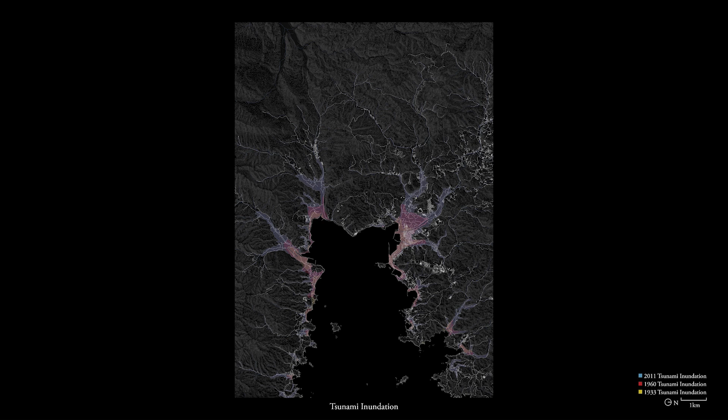Hadenya is in fact part of a constellation of towns along the coast, together known as Minami Sanriku. Minami Sanriku experiences tsunami once every few decades, with the most recent one in 2011 being the most devastating. After the tsunami, the government enacted a three-part strategy for reconstruction.

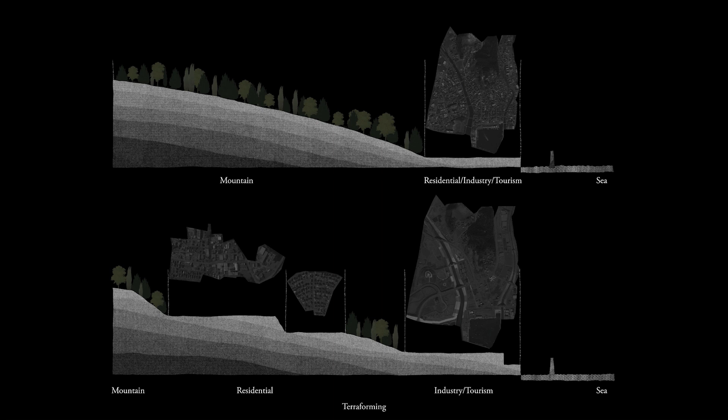First, modernist urban planning was devised in multiple towns, dividing them according to economic sectors. Second, the state terraformed the strata of Minami Sanriku, moving residential buildings to higher areas. Third, and perhaps most controversial, a series of concrete seawalls were built, despite past efforts failing again and again.

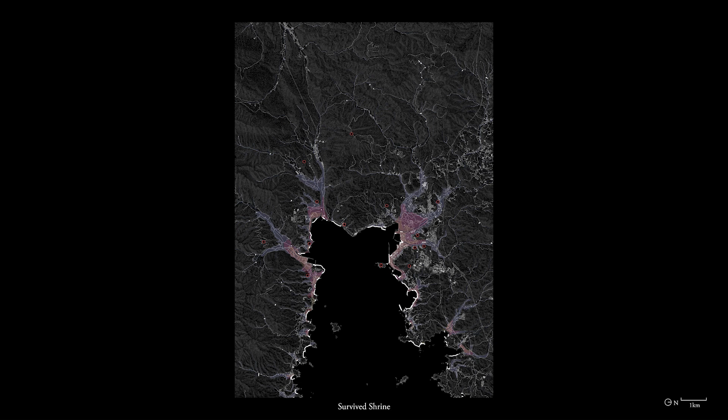Amidst the rubble, people noticed that a disproportionate amount of ancient shrines survived the disaster. The survival of shrines can thus be read as a passing down of an ancient knowledge system that conveys safety.

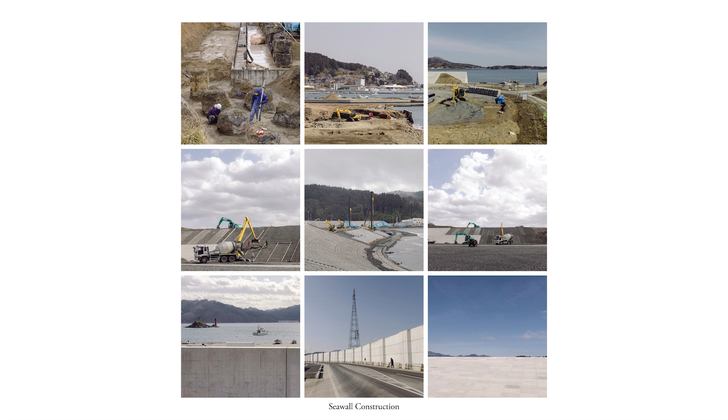Yet the festival continued. The view of the sea is not the only thing the seawall displaced. A knowledge system of safety and social relationships that once relied on regional connections and inheritance of memories is replaced by infrastructure that operates on a national scale.

The sourcing of material and labor for these megastructures can thus be read as a state-mandated attempt to inhibit local knowledge from forming. So, back to the procession.

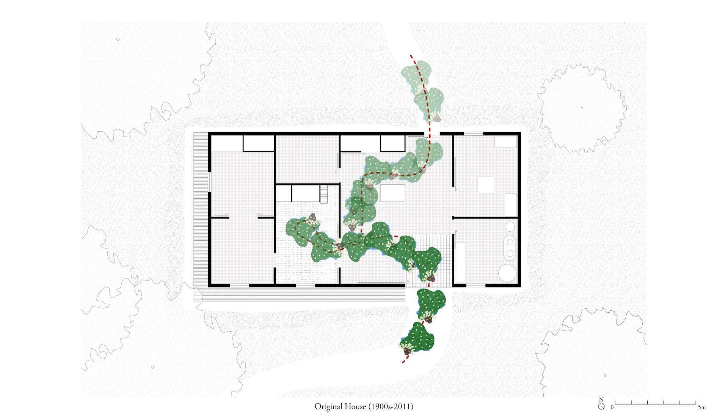As Harumi visits the homes, we can begin to see how the civic dimension of the festival ties into the domestic. The original house was arranged around a courtyard that provided performance spaces. The reconstructed prefab houses saw a minimization of these domestic functions.

However, in the corner of the house, the family altar remained. Referred to as Butsudan, the family altar becomes a miniature shrine where daily rituals of veneration become a mnemonic device for ancestral memory. The shrines and the festivals thus give us a clue of how people are attempting to mediate their own life against the status quo of disasters and infrastructure.

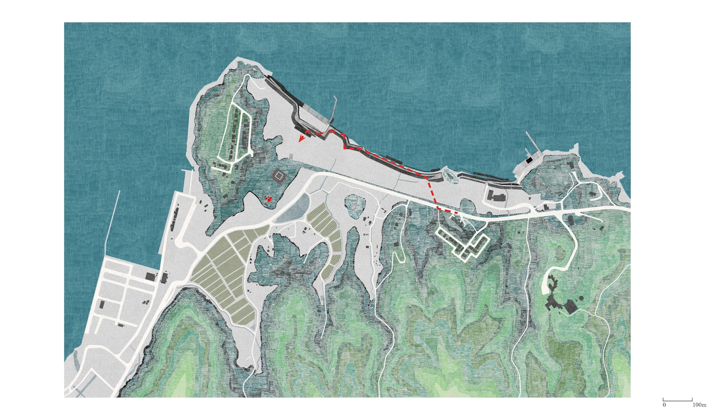Harumi and the procession find themselves on the seawall facing the shrine. It is here that a new series of spatial interventions were built.

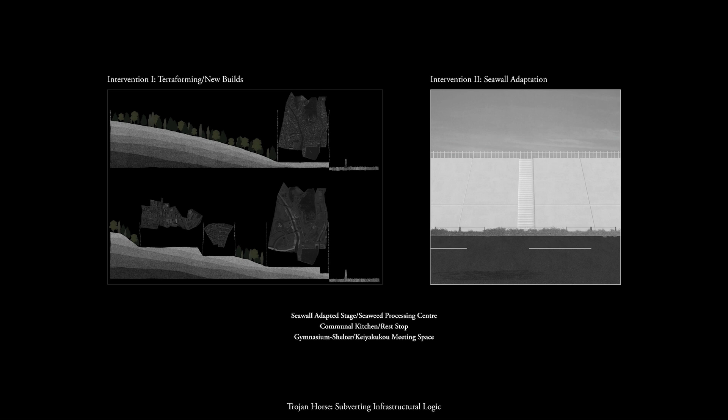Echoing the state's act of terraforming and seawall construction, I propose to implement the same language of infrastructure, but subvert it in a way that can be appropriated by the people of Hadenya. Looking into the town, the terraformed highway made the old road redundant, while isolating the shrine in between.

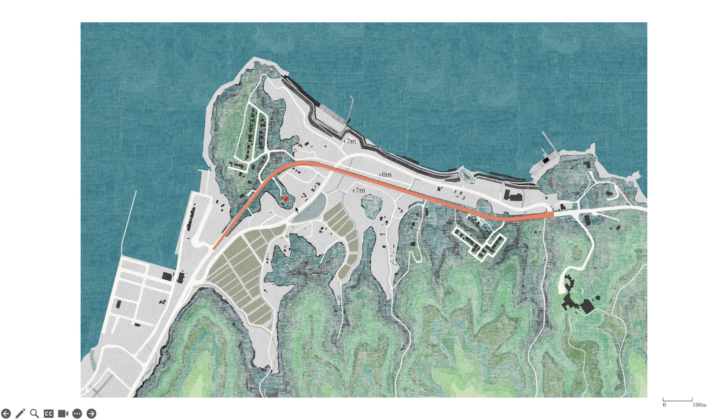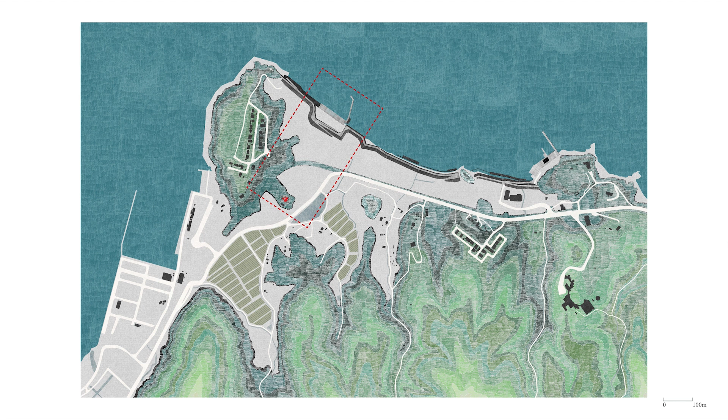As a first measure, I propose to combine the roads together to form just one road, freeing up the shrine and the spaces along the seawall. The parallel morphology between the seawall, the terraform land, and the shrine presents a unique opportunity for intervention.

Additionally, in front of the shrine is a dip, where the land is currently disused. It is in this site that I propose to terraform the land from 2 meters to 8 meters to reconnect the relationship between the shrine and the sea again.

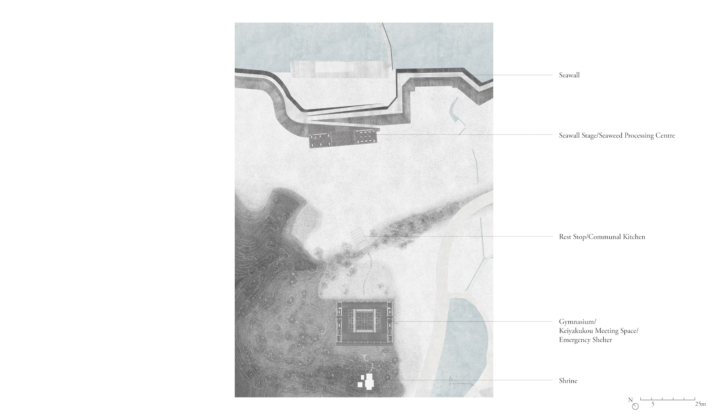Close to the shrine on the terraformed soil, there's a gymnasium that becomes an emergency shelter during times of crisis. In between the shrine and the seawall, extending from the old road, a series of step platforms provide a resting point for the town. Finally, a performance stage protrudes out of the seawall. The stage is also flanked by seaweed processing spaces during times of non-festivals.

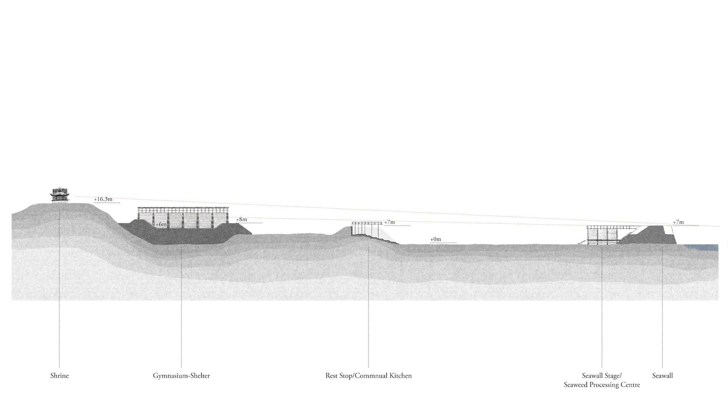The newly terraformed soil reclaims a new vantage point towards the sea, while conforming to the earthwork scale on a territorial level. Going back to the idea of infrastructure language, almost all of them are very heavy, characterized by monolithic concrete structures and so on. Meanwhile, a lot of the ceremonial languages we observe is very light, such as fabrics or timber.

Within my intervention, this contrast between the light and the heavy language also permeates throughout the design. By juxtaposing this contrasting language, the idea of permanence in the face of disaster is challenged. The contrast creates a rhythm between eternity and ephemerality.

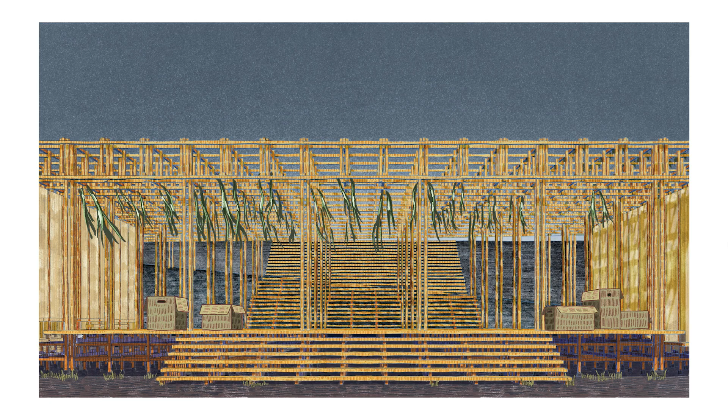Harumi steps down from the seawall and gets ready to perform at the stage. She remembers how it took years to build the seawall, and how the construction was merely a way for the state to boost their national GDP.

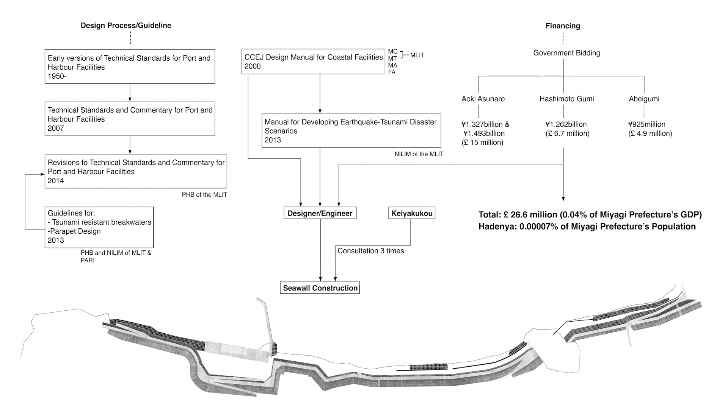Looking up to the sky, the smell of drying seaweed reminds her of the harvesting season to come. The lightweight timber creaks when she moves, and the timber stage underneath her vibrates gently when they dance. Against the seawall, the stage seems so vulnerable, and it was meant to be that way.

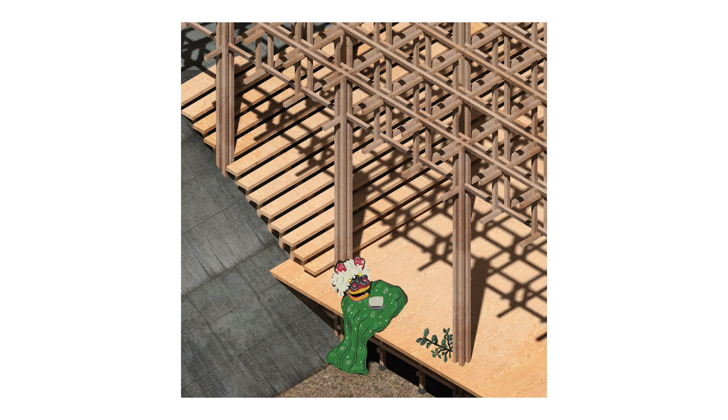She then leads the procession up the platform to where the road used to be. She remembers how her father used to rest at people's homes. Nowadays, this tiny rest stop provides a nice stopping point in the town.

She leans against the terraformed soil and looks at the kitchen where the Keiyakukou used to cook dinner last night. The rest stop reclaims the rhythmic pulse of the procession.

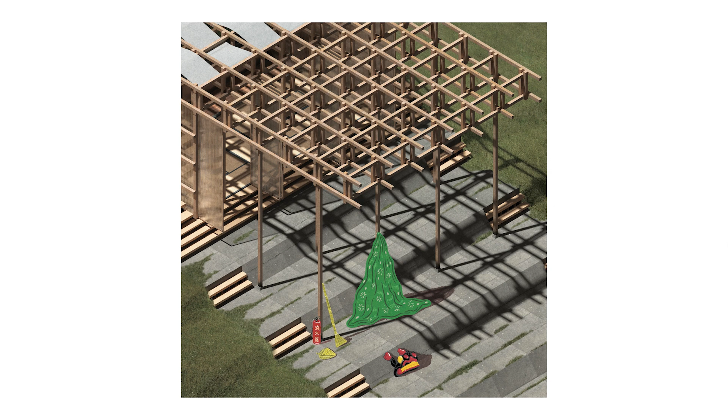Harumi gains her strength and climbs up to the indoor gymnasium. When they were forced to move to a nearby gymnasium after the tsunami, she recalls how strange it was for a place for sports to become a place where people lived.

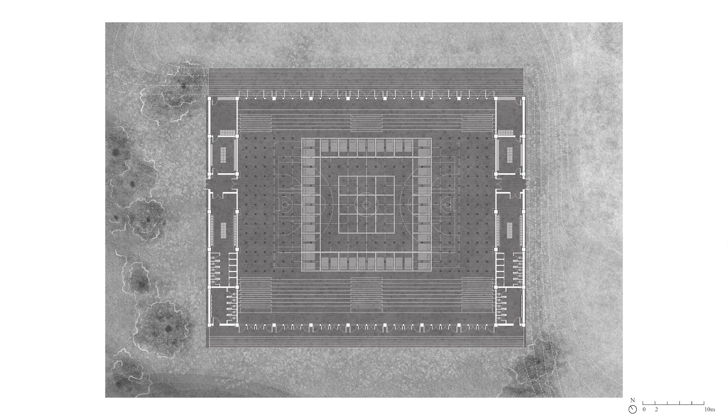She witnessed how the local fishermen used the space to rehearse their neighboring festivals. Today, the gymnasium shelter in Harenya accommodates all of these activities. Normally, it is used for sports.

As the sun shines on the lion's head, she notices how the heavy, tapered concrete walls support the delicate timber structures above, harkening back to the seawall and the stage.

Harenya is a town that is besieged by two things: tsunamis and state infrastructures. While prioritizing safety and economic efficiency, the state infrastructure interferes with the ceremonial lives of the people.

By employing the contrasting language of the light and the heavy, my project explored how this infrastructure could be reimagined to incorporate ceremonial and everyday uses. It is only within this context that people like Harumi could re-establish their relationship with the land, the sea, and to each other.